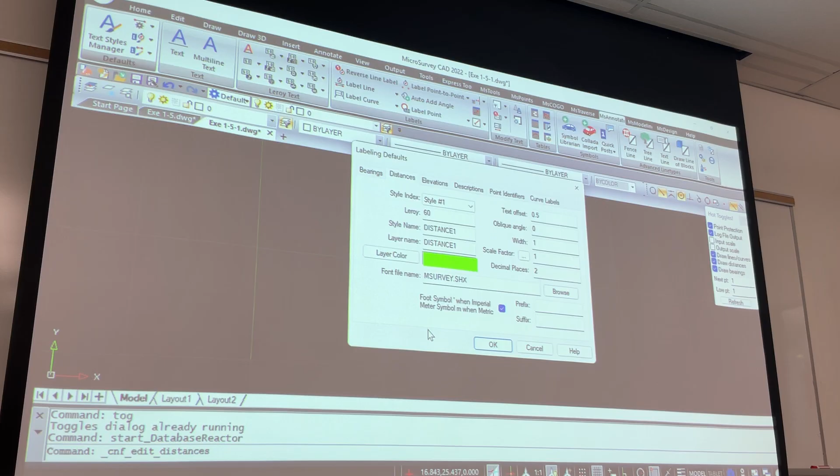Using this feature, you go to the traverse and create an existing point, and you see a new file. Make sure the point protection is refreshed, unchecked, and a new file, and save it in the same folder with a different name.

You press any key, and then this is 1031, 482, and 2003, 981, and say OK. Now for the range, you have to provide range 27.39, enter. And now you can escape from this, and if you go to active traverse, see my active traverse.

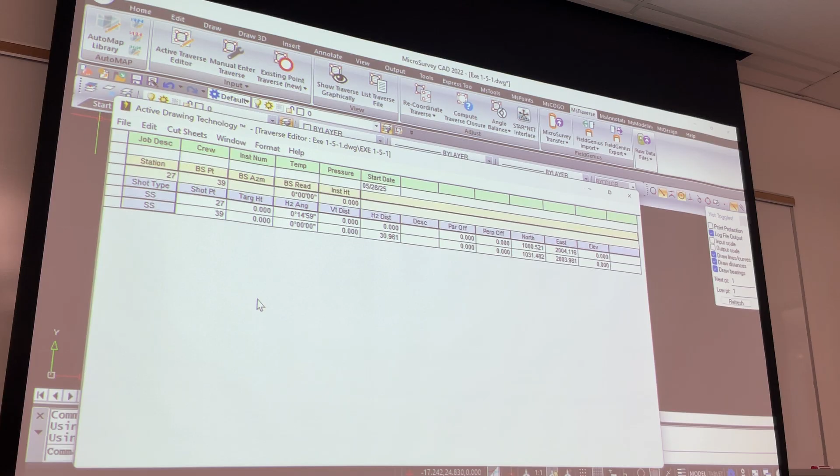You need to define what is the azimuth of this line and what is the azimuth of this line, right? Using the internal angle. Okay, that's what we did, and I already have all your information. I'm trying to plot right now, showing here.

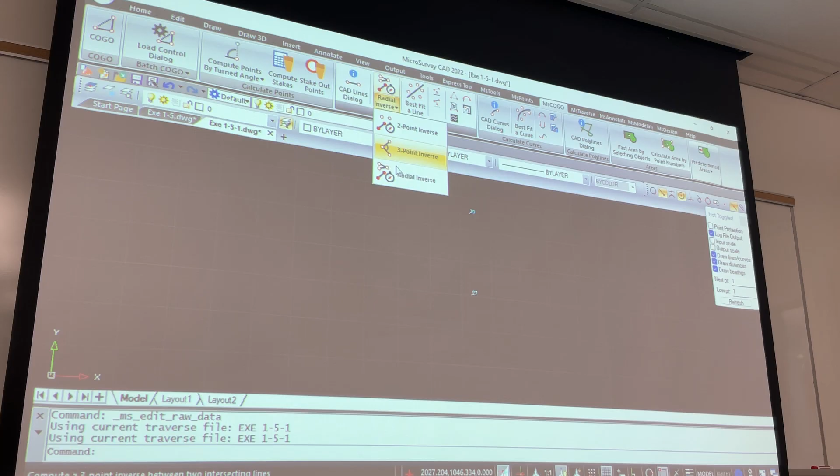So the first one we did is this line, 2 points, right? So I have everything with the active traverse editor, but I will replot this using COGO, going to radial inverse. And I wanted to start from point number 27, heading to point 39, and this is my first line with reading 359.4501 and distance 30 meters, 961.

Is that correct? All is good? Yes. Everybody happy with this? Yes, yes. Thank you. Yes, thank you. Okay then.

Then now from 39 you have to do your work and see what is the direction for that. We already know this, this direction is 119.3501. So I'm going to plot this for you.

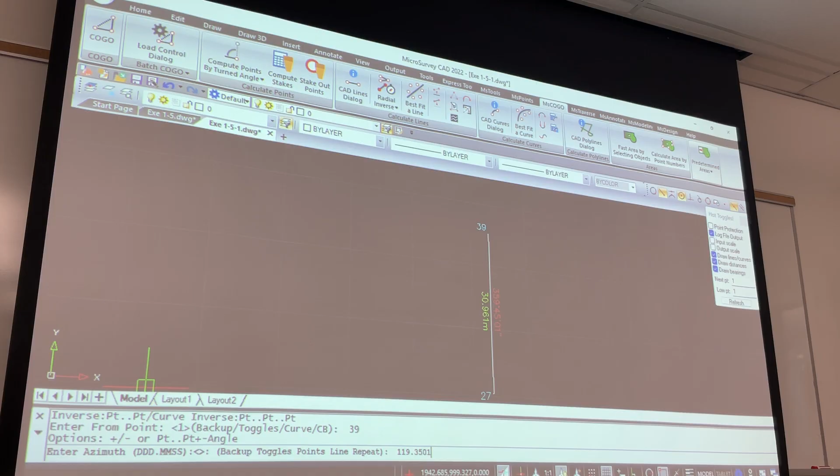From 39, 119.35, 119.35.01, and distance I believe 33. What is? Or you want? Okay, let's do it 40 because we don't know exact so far. Let's do it 40 meters or 50 meters, whatever it comes, right? And see where it's going.

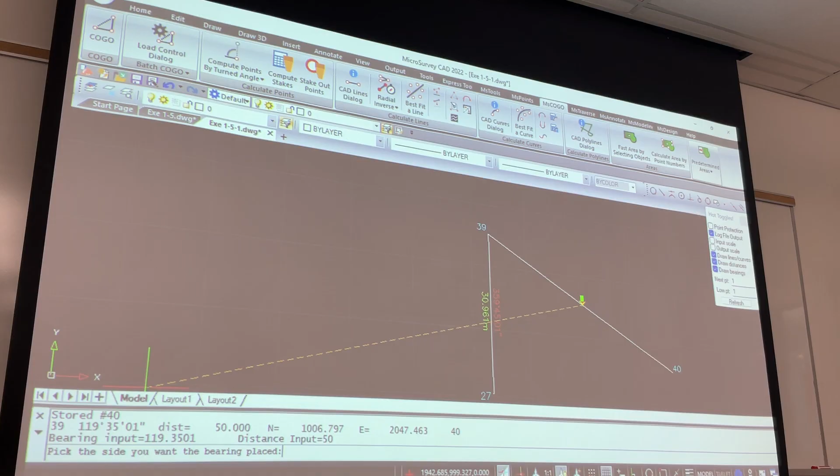So for 40, okay, I have this first line. Make sure, don't continue until you check this line is 60, 10. 60, 10, right? This is what we need.

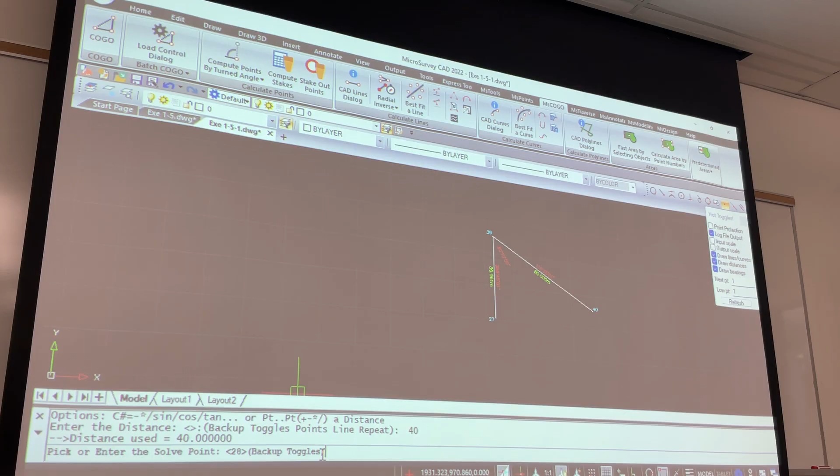And second, next one, the line is going from 27 now. And the direction is, we calculate as 63.0501. And let's put it 40 meters or 45 meters and click for distance 28, for point 28, and you have this.

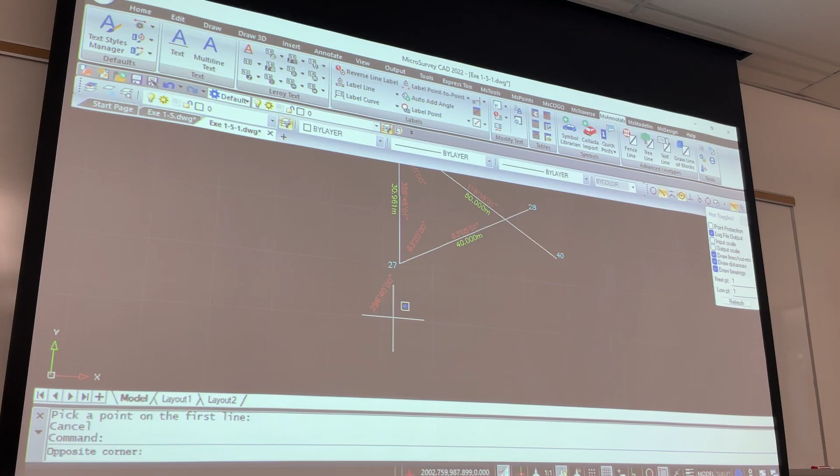If you check this, it's 6320, you are good to go and trim this, okay? If not, then you have to redo it. So 6320, that's fine. You understand this?

Yes, thank you. Now you're using the trim command, trim two lines, and get this distance, because this is assigned as 50. So you can reduce up to this and see it's 30, 33 something, 180. This is, yeah, 32 208.

You have to use a trim command. You can do it, and you can watch a video on it. You know, MicroSurvey has a video which is posted in the file, I have in the folder. The movie video for how to trim, how to do scaling, how to do this, how to do that. You can take a look and see it quickly. It's a 5-10 minute video, but it gives you all insights on how to do that.

Okay? You want me to trim it or no? Or good? No, we good. We good? Just do it? Trim. Okay, type trim, because if you go to the home ribbon, this is supposed to be...

Let me see if there is trim. Should be somewhere, trim here. Let me see, this is a new version, but I see the home one. Scale, stretch, plumb, cutting, rotate. I don't see trim here.

Anyway, if you don't have it here, just type 'trim' on the command line, it will pop up. And right away you can use this, and it's asking you to enter, select the line you want to trim. Okay, I want to trim this one. I click on this line, say enter, and click on this line, and it trims it right away. Okay? And same thing you have to do with the other one.

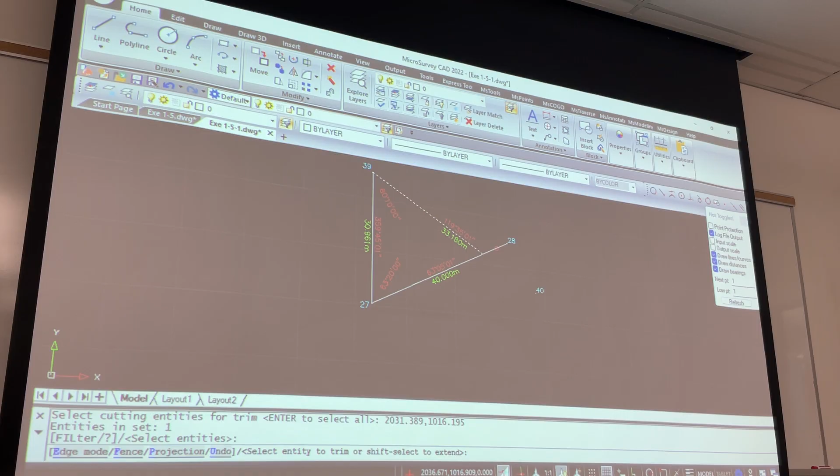And this is 32 208 instead of whatever we have, 40. So you have to change this for 32, 208.

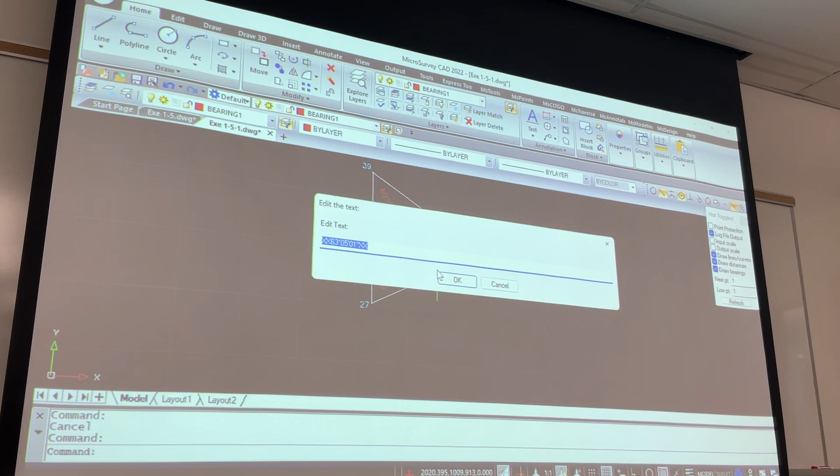And this is done, and this is also done. Just delete these spaces. Okay? That's what we need to know and how to do that. Then you will be able to finish this. You can move this a little bit if you don't want it to redraw, but you need to do the drawing, and this is the point as well. Bring the point as well. Either way, you can delete this and then also the value. This is how to work with this and find all this information.

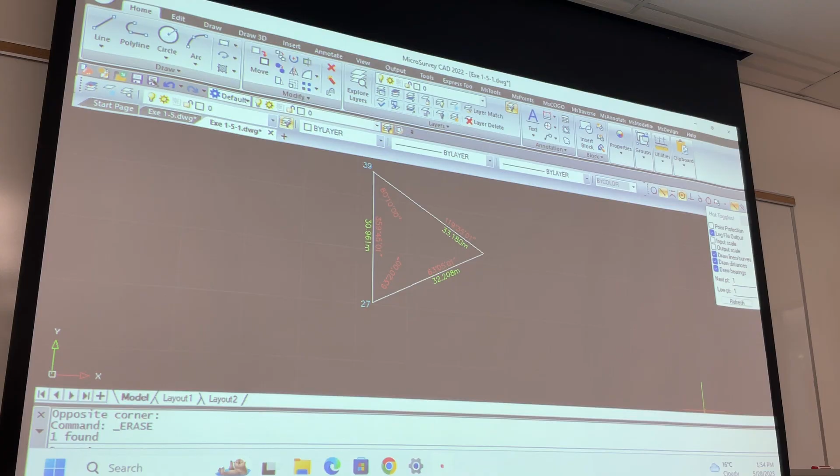All good? Okay, let's do exercise number 2, which is similar to what we have, but we need to work on this. Can you do this? So, given the distance and direction between 1 and 2, this is the distance and direction. These are the bearings right now. We are working on bearings. We will do the bearings right now together. It's asking you distance 2,3, which is this, and what is the distance and direction 1,3.

Now we do the bearing command in the microsurvey instead of azimuth. So I need you to calculate. Can you calculate what would be the bearing for this line? This is missing. Bearing for this line is missing. Five minutes, guys, can you do it quickly? And we will insert this command into the microsurvey. Okay? So the bearing of this is this. Bearing of that you will give me right now.

Pay attention. When it says north 70 degrees 50 minutes west, from which point are you going, and to where? Can you volunteer? Not to the left side, huh? And not to the east. So from which point to where am I going? From what, to what, is the bearing of this? What does it say? It's 70 50 from point 2, from 2 to 1, right? So this is my bearing. Basically, if I wanted to know exactly my bearing from point 2, I have to go this way. My bearing is this, right? That bearing is this one, this angle, 70 degrees 50 minutes. This is my bearing, northwest.

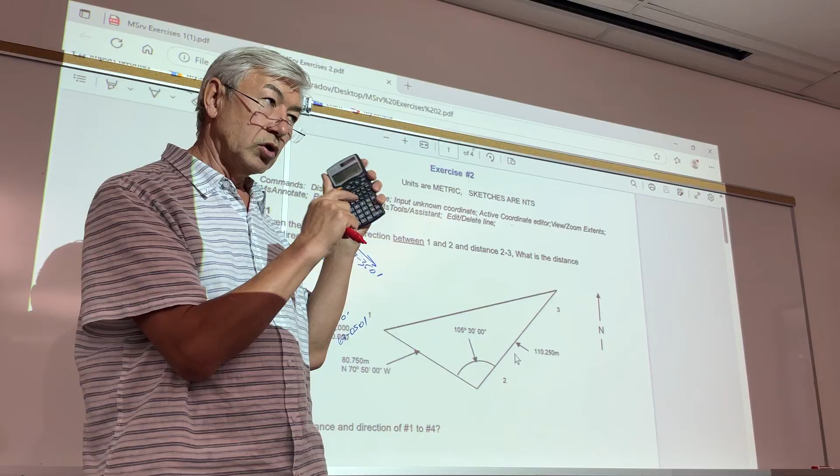Alright? If you do 360 degrees minus 70 degrees 50 minutes, you get 289.10. Make sure any brand is okay, whatever you prefer, but it should calculate with degrees, minutes, and seconds. You have to have that feature. Some calculators, like scientific, mathematical, or financial, don't have it. Make sure when you buy one - this is about $20 nowadays - buy something. If you already have one, that's fine. Bring one or two, that's fine, but make sure you have this.

Okay, now if you give me this, has anyone calculated the bearings already? No? Yeah, you did? What is the bearing for this line? Put it here, I'll write it down. Minus 180. I need the angle of this. What is the bearing of this line? This one? Well, 34.

So bearing for this, what is the direction? Oh, northeast. Yes, that's good.

So we have this, and which quadrant is it? This is quadrant number 1, northeast. This is quadrant number 2, southeast. This is quadrant number 3, which is southwest. And this is quadrant number 4, which is northwest.

So if a line falls within, you have to know the quadrant, because when you're working with microsurvey for the bearings, the format for the inputs would be this. Unlike the other one, which is an azimuth. When you put bearing, this is the number of the quadrant: 1, 2, 3, or 4. You understand this? For the microsurvey CAD, you have to define which quadrant the line falls in.

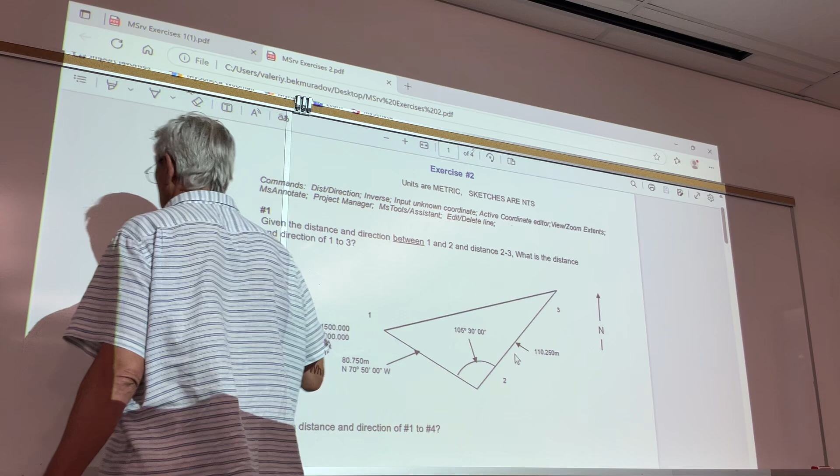So let's do this on the microsurvey now. I have a first line, I started with this because I have an initial coordinate. So I'm using this information to plot 1, 2. But keep in mind this is quadrant number 4, right? Yeah, 4, because it's going from 2 to 1.

Or if it's going to that one, then it will go to quadrant number 2. So if we start from 1, I have to assign quadrant number 2, because it's going from 1 to 2. Okay, let's put it this way. So I assign 1 - did I assign 1? No, I didn't. A new one.

So exercise number 2 is now metric, but bearings right now - we're working with bearings, okay? 800 if you wish, 700 if you wish, that's fine too. And this - make it 60, that's fine. And this one is okay. And bearing, remember bearings right now. Alright, make sure we have 3 minutes. And now we're starting from 1.

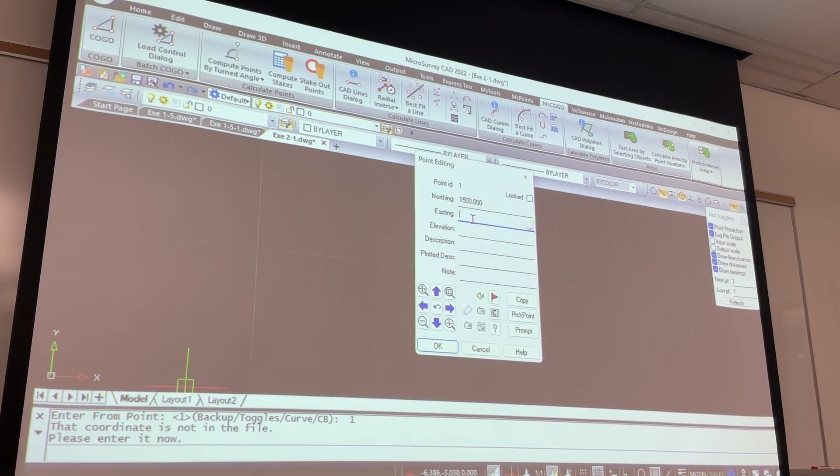We're going to use the bearings this time, and we're going from 1 to 3. Okay, 1 to 3, from point 1. And then the given information is 1500, just filling out whatever was given to me from that map, and 3000.

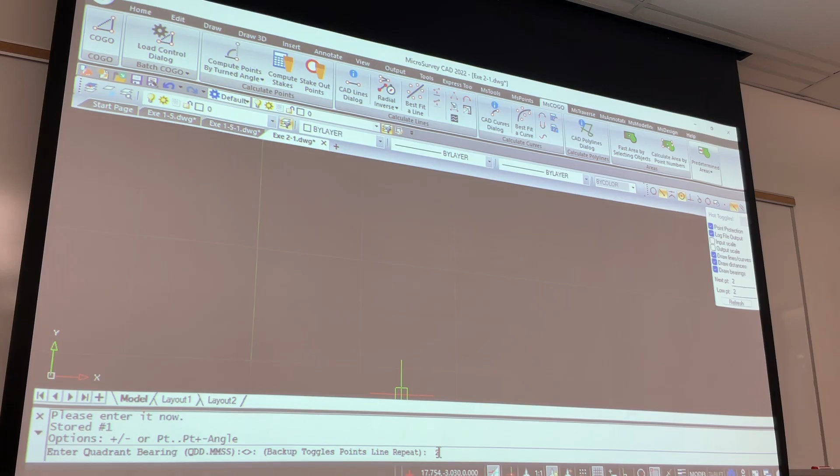This one, because this was north, east, now southwest - southeast, sorry, southwest. Southeast, sorry, this is north. Only the direction changes, and the letter changes. This is quadrant number 2, that's why I put it on. If I don't put number 2, it will go the opposite way. But let's look at these 2 and see what will go.

Okay, and the distance is 80, 75. And so for point number 2.

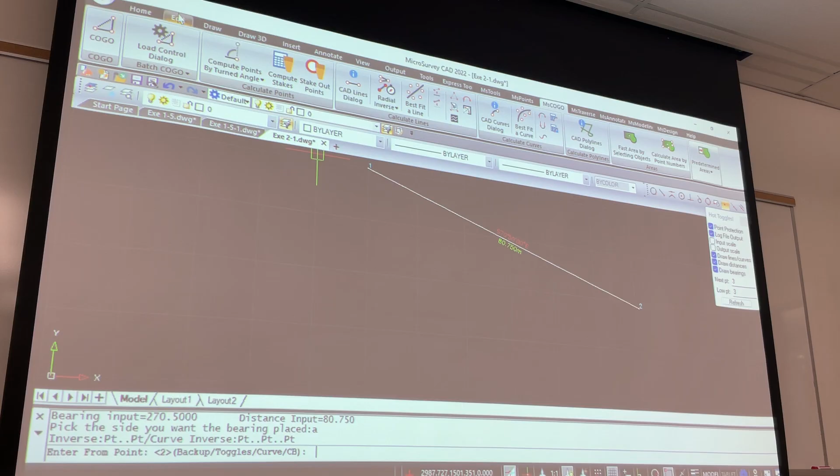Take a look and see what's happening here. I went from 1 to 2, exactly what he's asking me, right? If I use another quadrant, which is quadrant number 4, I will go from 1 in the other direction. The 2 would be on top instead of down.

This is the first line, segment or leg, whatever you call it. So south, east, 70, 50. Distance is exactly the same, like it's required to be. It's not to scale, but it still looks the same way.

Now for this one, the angle is given and you need to calculate. You have to do the homework. You calculate what will be the direction. We calculate 3440, okay.

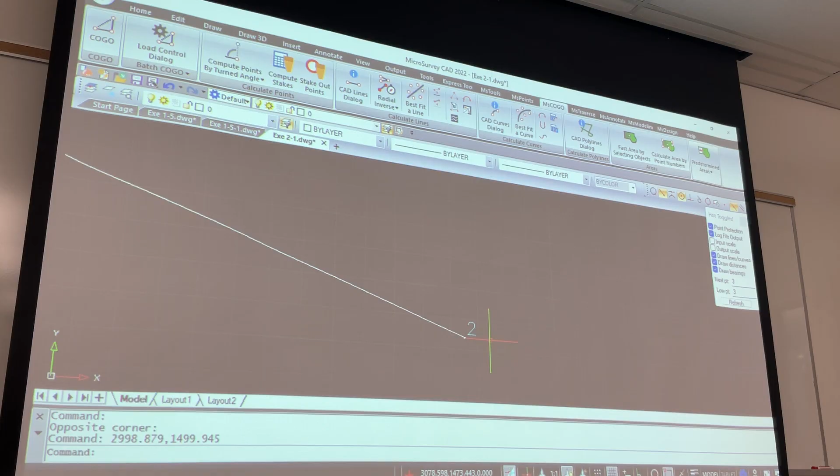I was using the data from your classmate. It says 3440, okay. Let's put that in quadrant number 1, right? So let's work on that from 2. Let's move this far away and calculate.

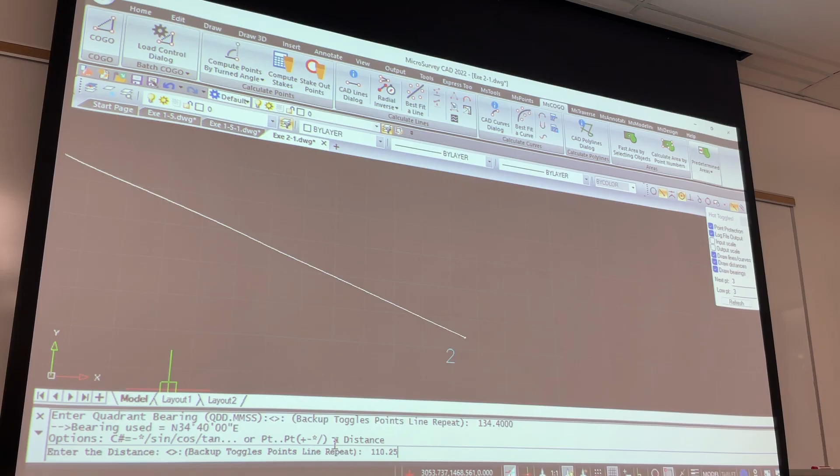From 2, bearing again, and this time what quadrant do I have to put? Quadrant number 1, 34, 40. Correct? Enter. And distance for this line is 110, 25. Correct, okay, and heading to point number 3.

This is what I have here with me. So north, east, 3440, and I wanted to make sure my angle is 105, 30. Let's see, so my angle is 105 degrees 30 minutes.

So we calculated wrong? Is this line wrong? I think... so we have this 70, so the missing angle will be... this angle is given to us.

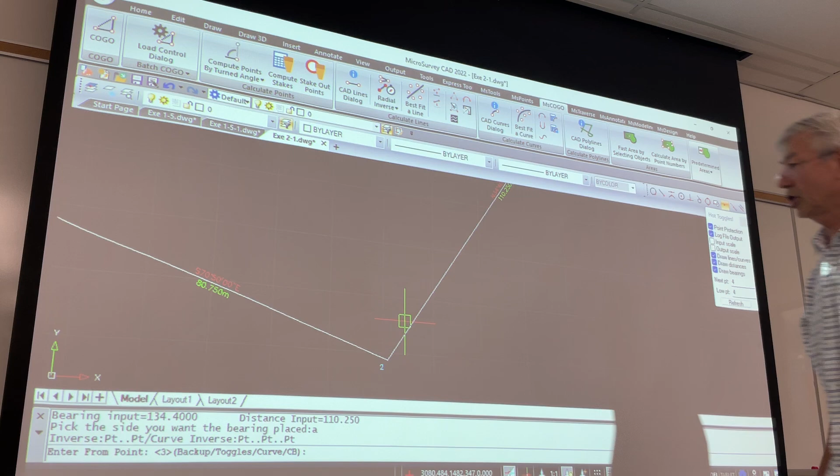Let's see, because I used the data from your classmate. He gave me this direction. I said go there and you'll find gold there, not a crash. Gold. So I'm getting to his advice. Let me see if I can use this and define the angle.

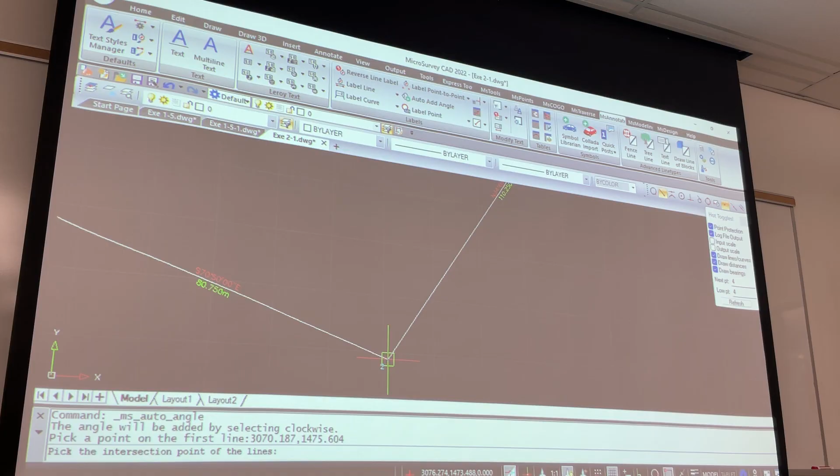Correct, maybe, yeah. So he gave me the right direction for gold. Okay, 34 degrees, 40 minutes northeast. What was your question? Are you saying something is wrong? No, I was just checking.

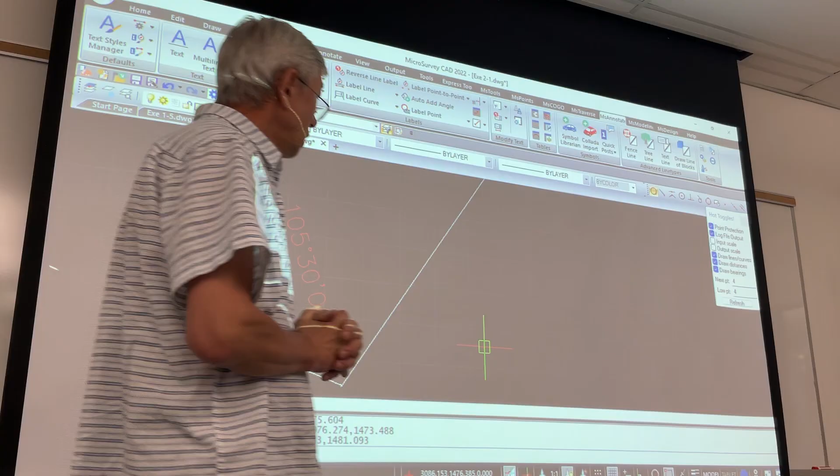If you look at the graph or the diagram, you'll see it's easy to find what the direction would be if you go into the diagram, like this.

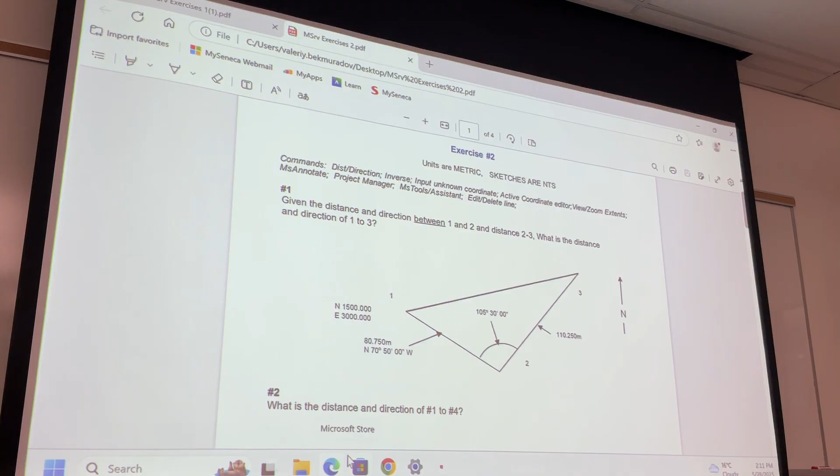This angle is given. If I use this, you can extend it up to this point, but you only have this. You can work on it a different way, but he calculated based on the value 289 probably, and added this angle, which is 105, and deducted from 360, you end up with this value.

Remember this is in azimuth. You can work in azimuth if it's convenient, or you can use bearing as well. You can extend this and see what you get. If you extend this, you can calculate this angle as well, because this is given to you. You found the missing angle. You can use 2 or 3 ways to calculate that.

But he converted it probably to azimuth and did it quickly, because we have the bearing 70. Yes, so I calculated the missing angle here. If you extend this, the angle is 70, but you don't have this directly, you have to calculate it, because this extension is 180 minus this gives you something else.

It's a little bit of extra work. Do you understand? Is everybody happy with this or not?

So we have this information and now we need to connect 1 and 3. Distance 2 to 3 we have 110. So here is the direction between 1 and the distance to 3. What is the distance and direction 1 to 3? Okay, no problem with that.

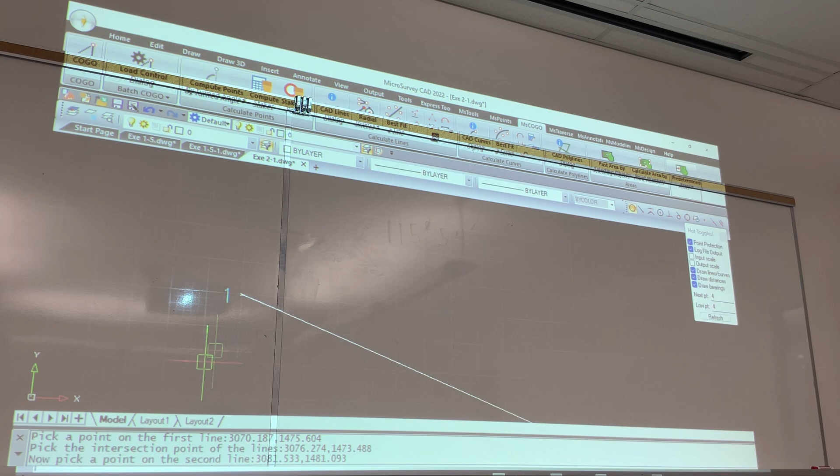1 to 3, we're going to use COGO, and we're using radial inverse 1 to 3, right? This is 1 to 3. Yes, so we click on 1, which is here. You see this time I use the scale 1/700, and the numbers are small.

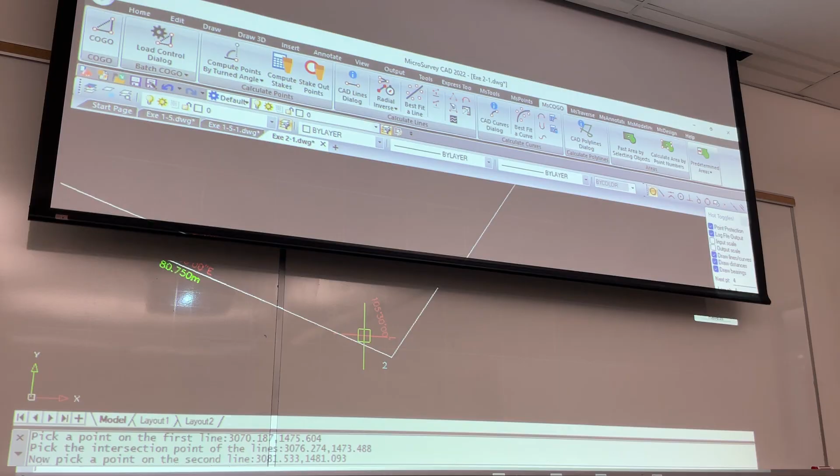You can do the scaling, you can scale up, but if you use 1000 it will be more readable. You don't need to scale, but sometimes you want to, and you can scale down or scale up. So let's put in the values.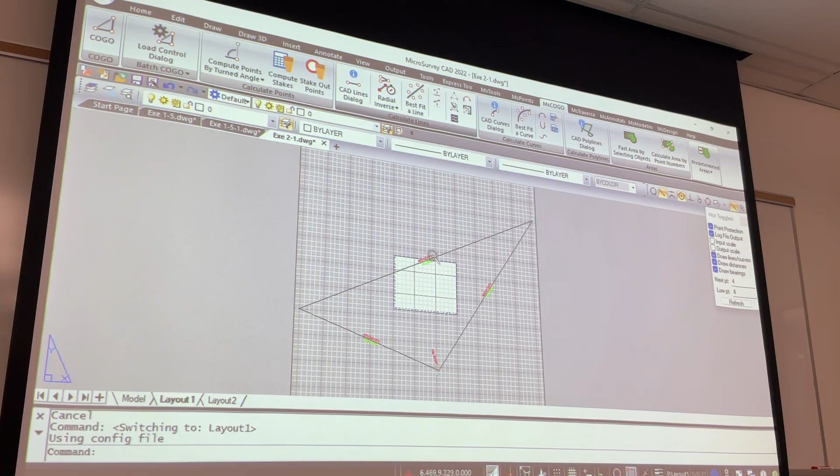Okay, make sure this is okay, and make sure you can see everything here. You can plot it and save as a PDF if you need it to support your goal.

Angle? Angle is 65.1305. Is that correct? Is the same? Sure, yes.

Oh yeah, I forgot this. You can uncheck it, in case if you save it, I'm processing right now. But if you don't check, you need to uncheck it, then it will be saved on your computer. Otherwise, if you return back, it might be erased. It's not holding the points again. Once you do this, if something crashes, you will miss that row. So make sure point protection is unchecked.

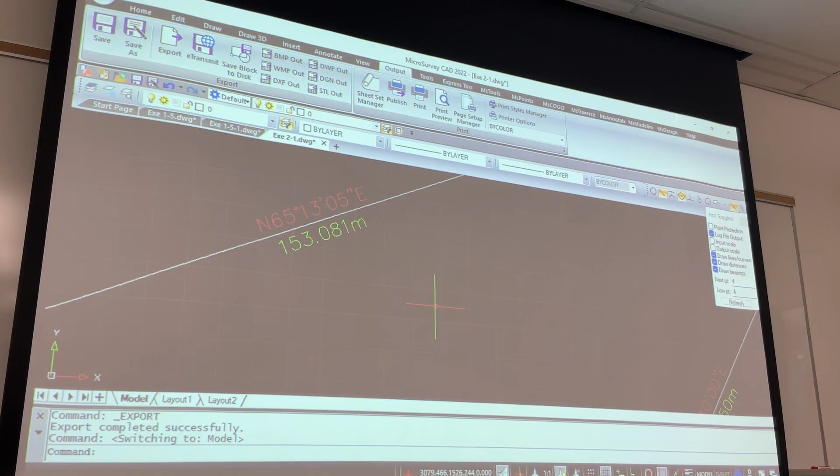Okay, any questions guys for this? Now question number 2, which is the next one. Can we work on this quickly? What is the distance and direction of 1 to 4? Can you do that? Okay, we have a distance from some courses, like your traverse. You didn't do traverse here, right? You need to work with traverse. You have azimuth from 1 to 2, you have put it here. You have to do what?

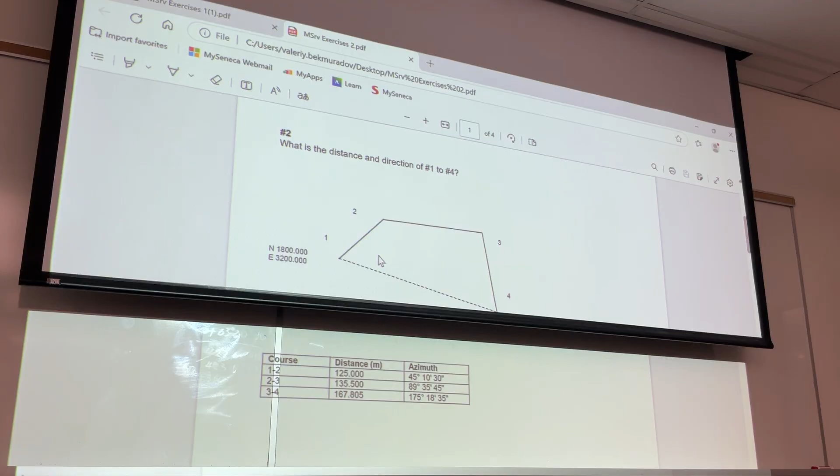It's easy because you don't need to calculate anything, because everything is given. Azimuth for all directions, you can just put it inside the MicroSurvey and give me the final answer. I need this answer from 1 to 4. Can you do it quickly? 5 minutes? We're using this data. I'll show you what the data looks like.

So this is azimuth and distance here. Azimuth 1,2 is 45 degrees, 10, 30. Distance, let's put a different color so you will be able to see, distance is 125. 2,3 is 90, azimuth is 89, 35, 45, and distance is 135. And the other one is just 175.

Okay, here's a trap for you guys. Sometimes azimuth is given reverse, so you have to make sure you're placing the correct azimuth. It might be a trap on the test. The distance is 167.805.

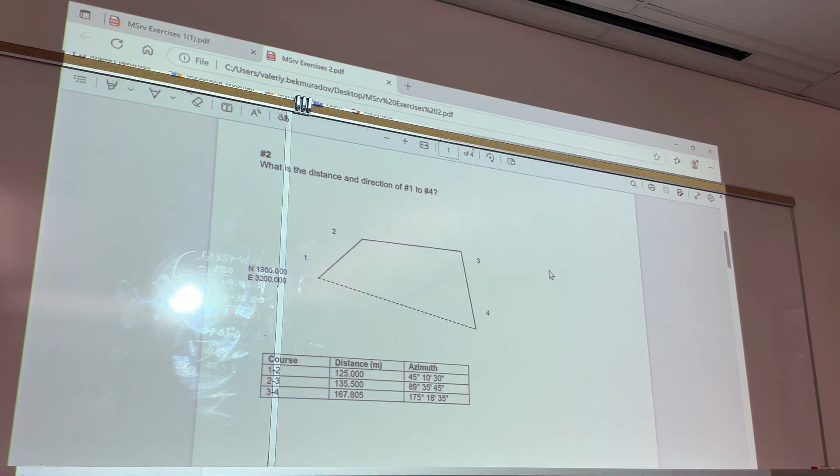Number 3 is, what is the distance direction 4 to 3 now? You have an internal angle this time. You can work with the azimuth or you can work with the bearings. This is the bearings, you can calculate what would be your information. You are missing here only this value, you need to know exactly what it would be. Okay, let me erase this. You need the direction of point 1 to 4, it comes with the bearings, right? So you have to use the bearings of this 14.

And you have to calculate direction bearings for the 4, 3. Make sure it is exactly what it's asking you. Don't do it opposite. Bearing 4 to 3, and distance. This is what you need to answer for question 3.

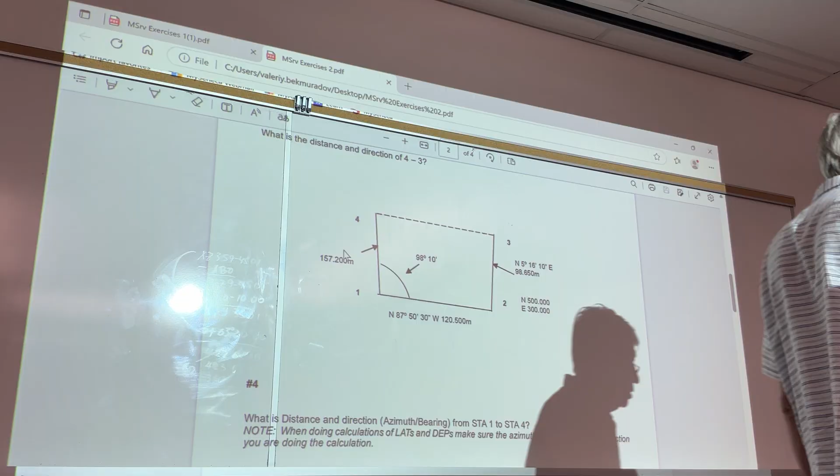Is it 108 degrees 11 minutes? Which one, the previous one or this one? Previous one, sir. 108 degrees 11 minutes 20. Yes, that's correct. And distance? 250.3.

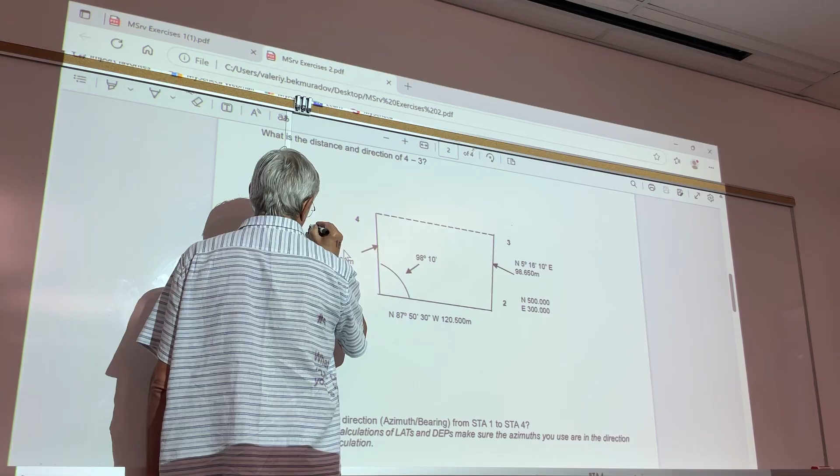Can you work on this, please? Find what would be the bearings for this, with distance. This comes from the MicroSurvey, but this needs to be calculated on your own because you have an angle inside. Draw the line and you will be able to find it. Work with the bearing.

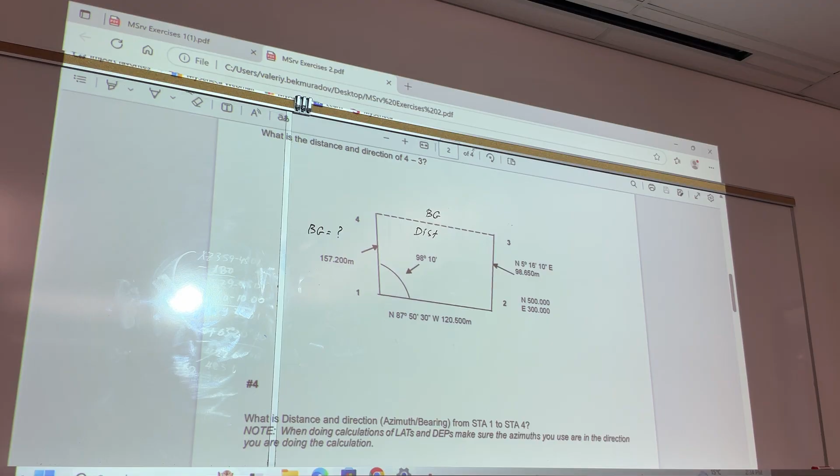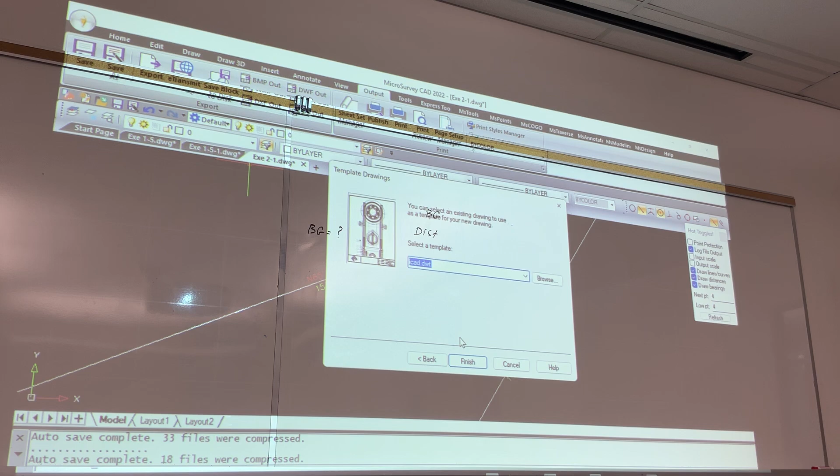So let's close this, I'm going to use my exercise. Exercise number 3. Come on. I think he's gonna pass away. Bro, come on.

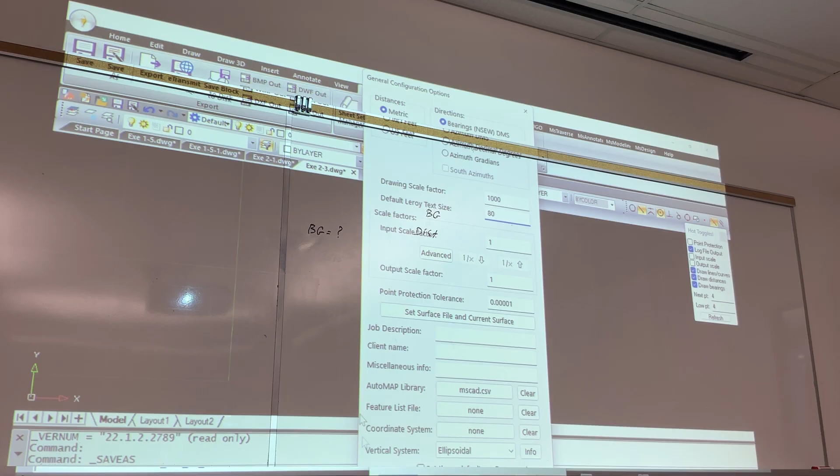Let's start with point number 2, which is the revision asked for us. For 1.1, I did point 1 with north, west, and quadrant number 1.

First line is here, something like that. You're saying now 8 degrees 10 minutes, okay let's go. I plot the quadrant number, it's quadrant number 4, 0, 8, 10, and distance is 157.200. I'm heading to point number 4.

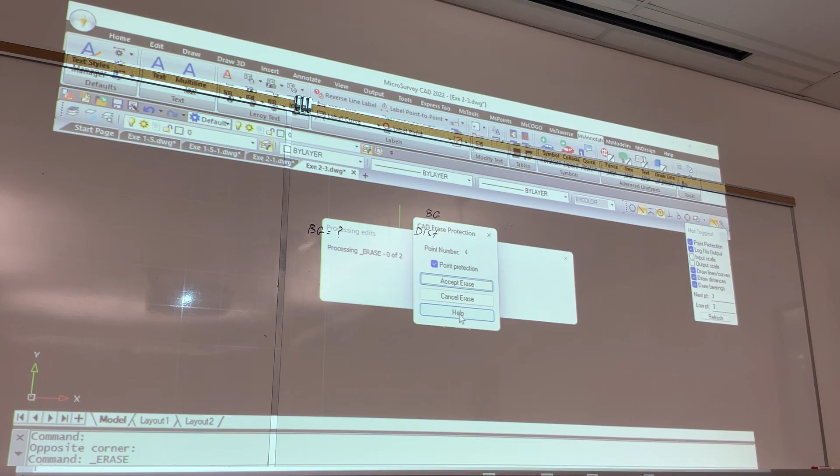From point number 1, point number 4, 0 point. Okay, let's do my calculation. Now let me check this, correct or not?

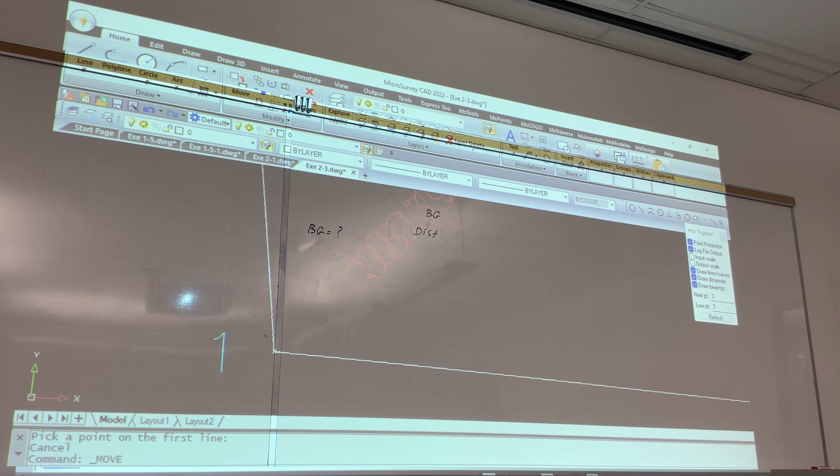You need 9810, but my calculation is also not matching. How do you check the angle? I forgot. How to do this one?

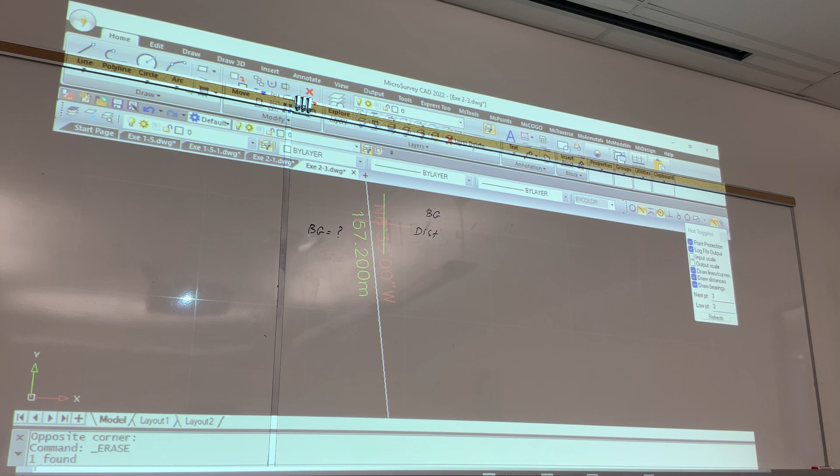So 40 seconds, 30? But this is 60 I got it, degrees. Professor, you got it? Yeah.

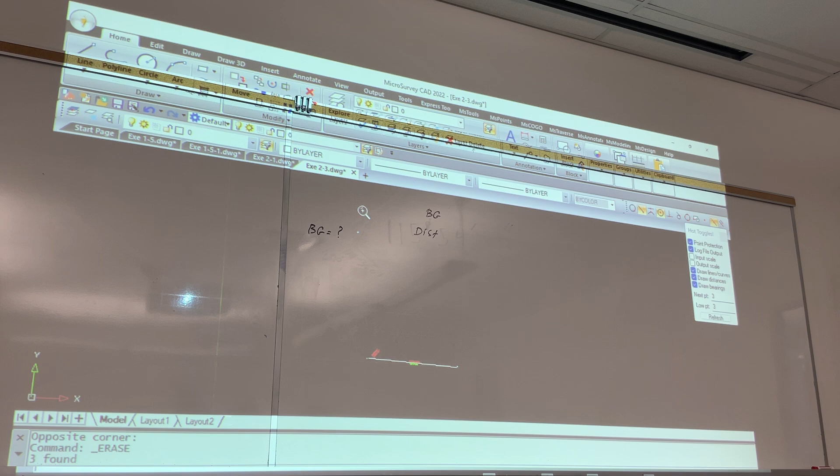How much? Oh sorry, what is your northwest direction from 1 to 4? Tell me, 1 to 4? 6, DMS whatever, 0, and 6 again degrees. How many minutes? 0. And 30 minutes, seconds. Okay, I have to change it for 6 degrees, 0 minutes. Let's redo it, and 30 seconds. Okay, let's redo it and double check.

So, we're going to check right now.

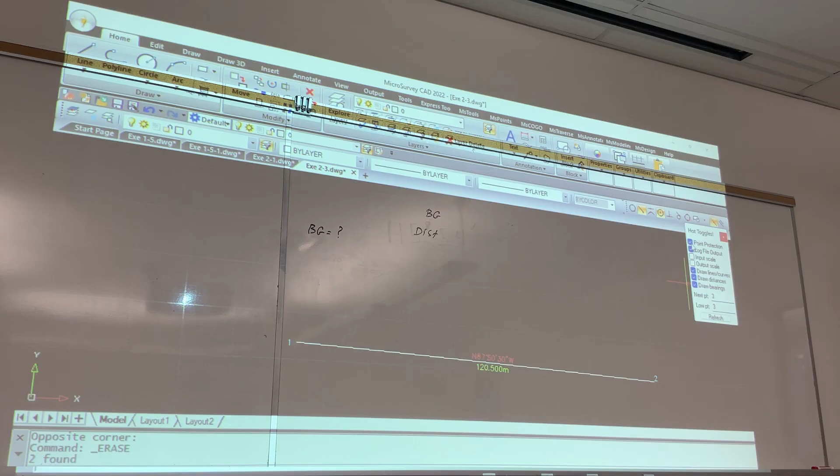If I go forward, I wanted to draw the line from 1 to 4. So from 1 to 4, my value would be 4, 0, 6, 0, 30. I was adding the tactics and then I checked the angles. Something like that? Mine is the same, but you used another method. I did this here.

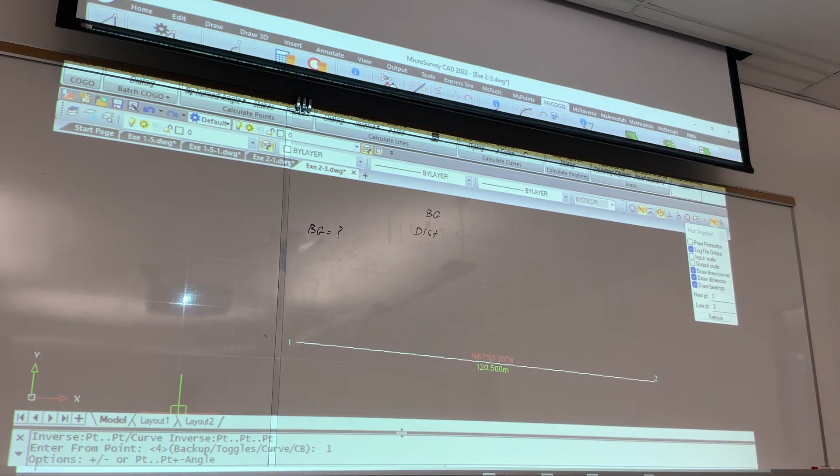You know, this from 2 to 1 is this, right? I went back 180. 180 plus 98. Yeah. So this from here to here is this, right? 2 to 1 is this. I went back 180, I got this. I added this 1 to 2, 6, 0, plus 0, this, 30. I got 366 minus 360, should be correct.

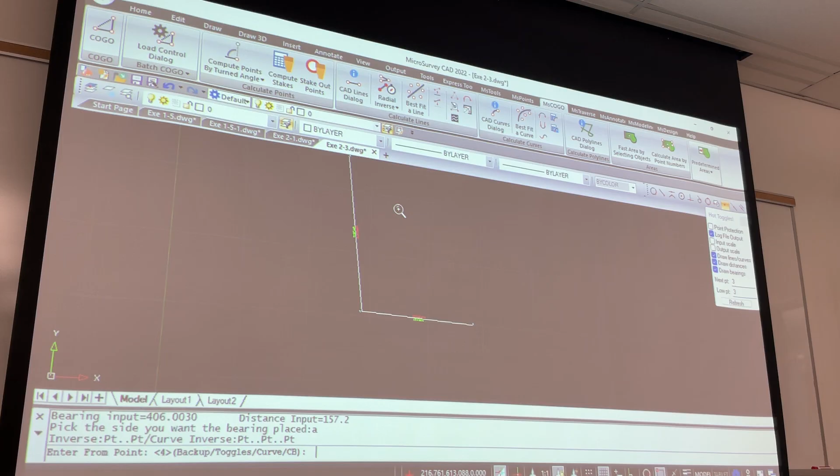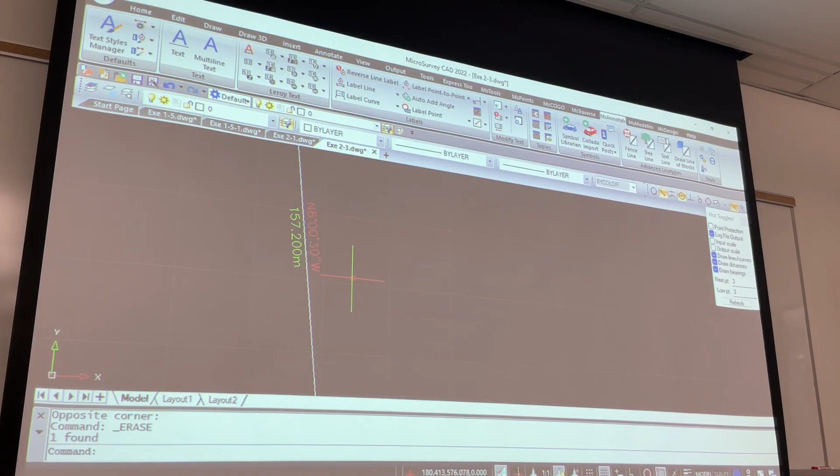Yeah. Can you give me the value for the direction and distance for the 4 to 3 in bearings? 4 to 3. I got south 60, oh, the distance is there. Yeah, yeah, yeah. South what? 68 degrees, for the 4 to 3?

Yeah. I don't think so. Who else did the numbers? 60 degrees, not correct, should be 71 something with change. 66, 71 with something with change. Southeast.

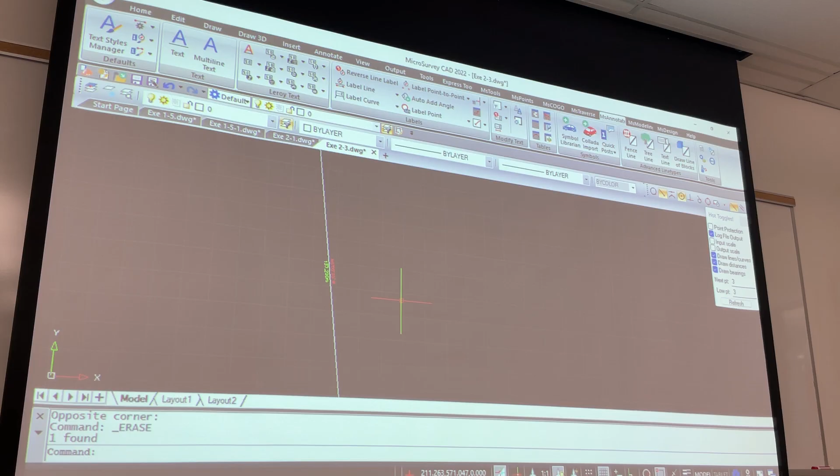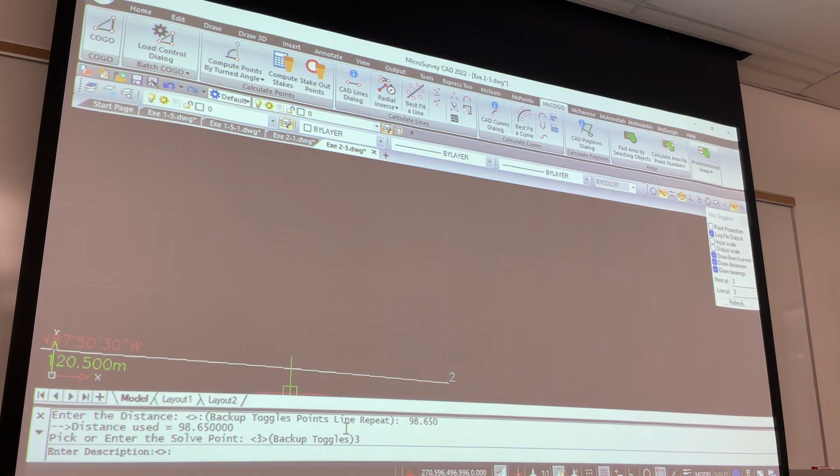Okay, let's plot first the 2, 3, because I have all the information and we'll double check. So from the 2, going to, well, I'm heading to the northeast, which is quadrant number 1, and this is the value 0, 5, 16, 10, and I have a distance which is 98, 650, 3.3. So this one is correct because it's given to me. Now I want to know exactly what happened with 4 to 3, right? So I draw the line, it's easy. It's the only way to complete this task on 4 to 3.

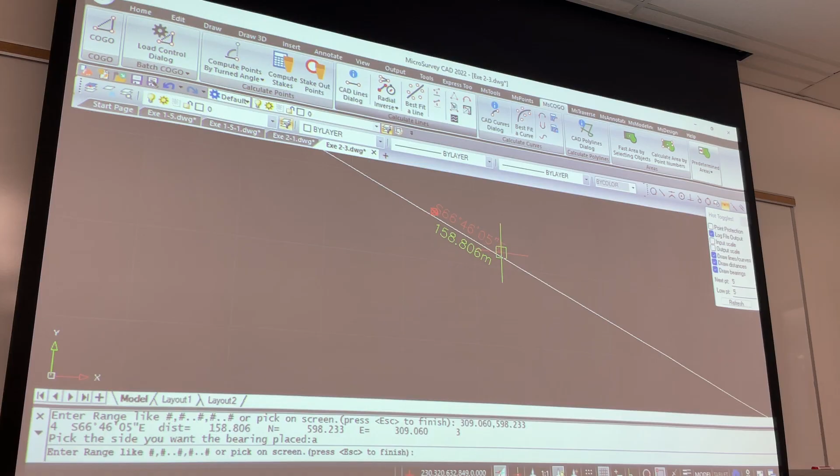Okay, yes, who said 66? I said 66. That's correct. Thank you, 66, 46, 46, 05.

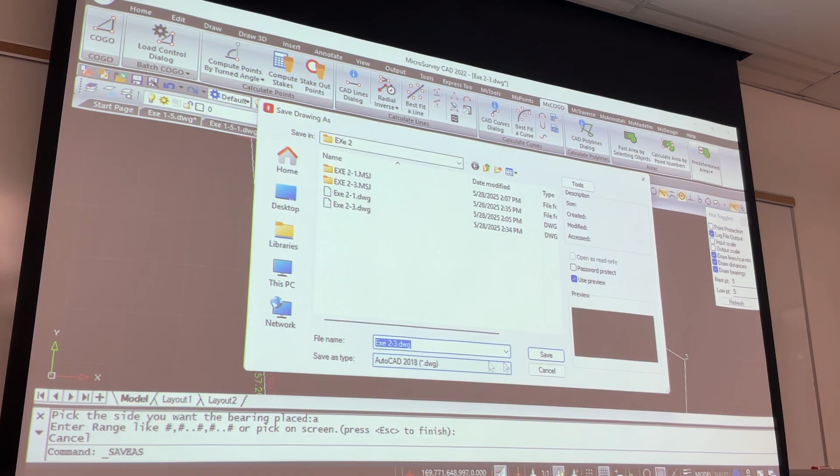All is good? Everybody happy with this? Yes. How about the next one? Next one, let's do it one more and that's it for today. Let me see how much time we have. We have 30 minutes. Okay, let's do it one more. Last one today and that's it.

So the last one requires you to work on it again, to calculate some directions. So what is the distance and direction with the dashed line? This one is station 1 and this is station 4. So you have to calculate this first. I'll put what you need to know before doing the calculation, what main items you use for direction calculation. So basically asking you to recalculate and find the unknown and close this problem, right?

So let's see what's going on here. So this azimuth direction is given, station 1 to station 2. Distance is given as well. Angle is given, distance is given for this, but not azimuth. So you have to find out the azimuth for this line. Azimuth is not provided.

For the line 2, and this line is a 3. I think it's 3, yes. So this line is 3. This line is 4. This is a 3, this is a 2, and this is a 1. So you need the azimuth 2 to 3. Distance is available. And you need azimuth 3 to 4.